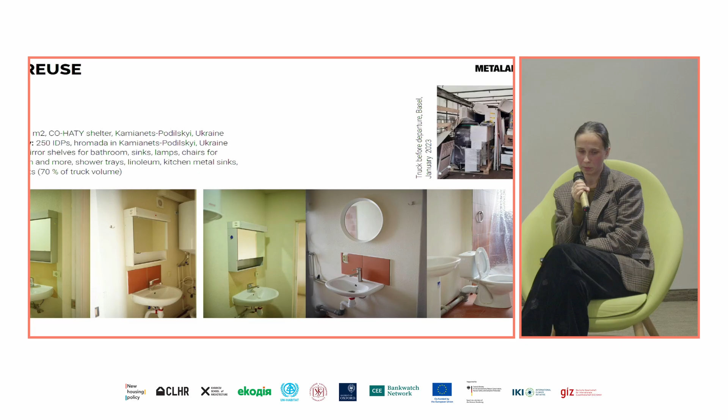Reuse for us is a story about preserving memories.

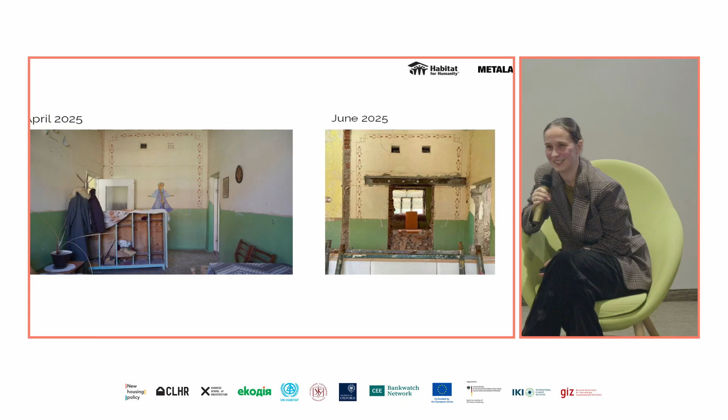We also shared stories from the kindergarten, and this city mayor went to this kindergarten. It was pretty interesting. And also there was a kindergarten teacher's assistant. She cited a poem, told us an interesting story.

We understood that this integration really means something and can even happen via architecture.

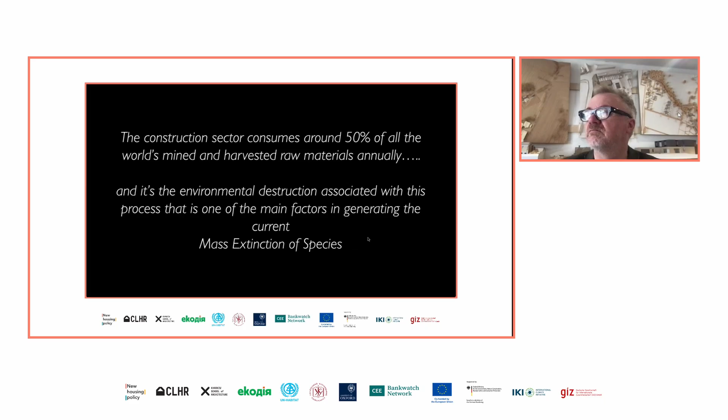The United Kingdom alone consumes 600 million tons of products every year, and it generates 200 million tons of waste a year. And the construction sector is responsible for 2/3 or 63% of that, which equates to 120 million tons of material coming from the construction industry into landfill and incineration every year.

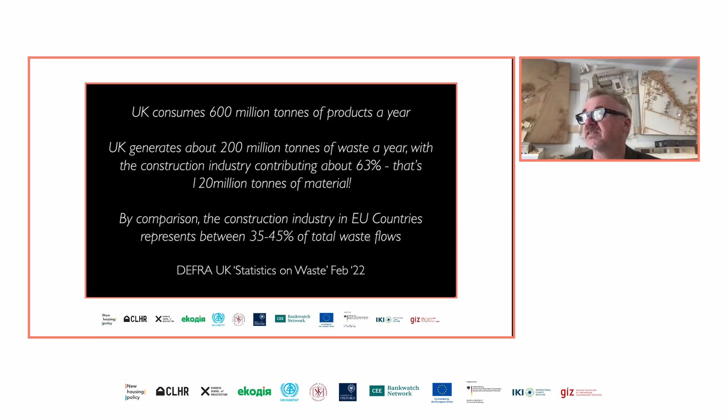Now, by comparison to the rest of Europe, the construction industry across Europe will create between 35 and 45% of total waste flows, whereas in the UK it's more like 63. So I say to you, hold on to what you already have and reuse it. Avoid the tariffs. And by that, I mean the Trump tariffs. We never know what things are going to cost because we never know what the tariffs are going to be.

I understand there's going to be further tariffs today on countries complying to the 1.5 degree temperature rise Paris Agreement. It's all about managing your existing resources and dramatically reducing the need to consume new raw materials, and reducing reliance on the previously manufactured.

A phrase I came up with in my book in 2017: mine the Anthropocene, or the Anthroposphere. The Anthropocene is the current geological epoch we're in, the human-made geological layer that wraps the planet, whether that's ocean plastic, landfill sites, or our cities. But if we mine the Anthropocene, we can nurture natural resources, give them a break from supplying us with raw materials. We've got to reuse the previously manufactured.

The challenge in doing this is that planet Earth exists as an ever-accelerating linear economy, where we take natural materials, process them, make them into things, and moments later throw them away. No other natural system works like this.

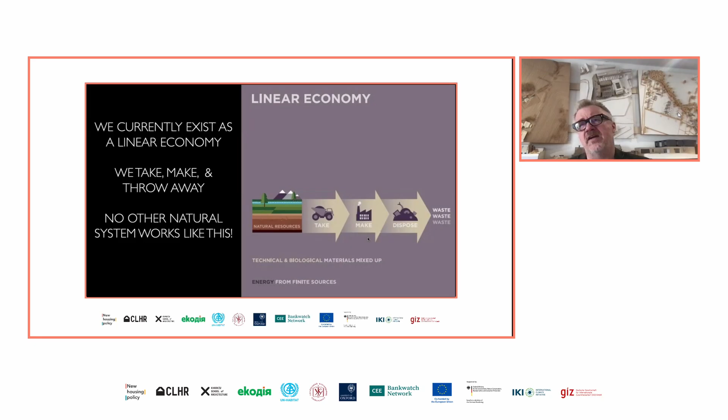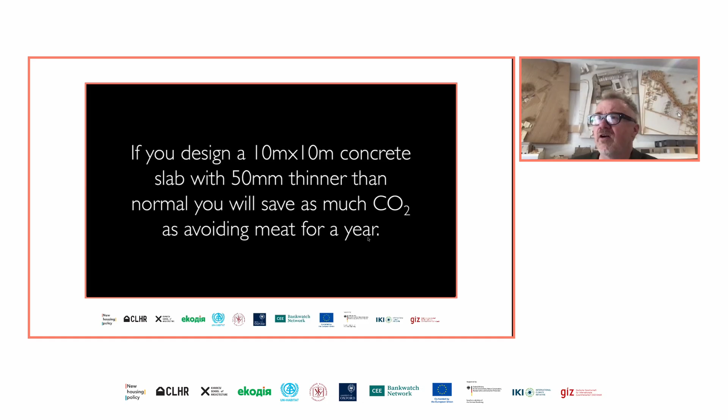Some good news: we know what to do. If you design a 10 meter by 10 meter concrete slab and make it 50 millimeters thinner than normal, you'll save as much carbon as avoiding meat for a year. We are in an impactful industry in the construction sector.

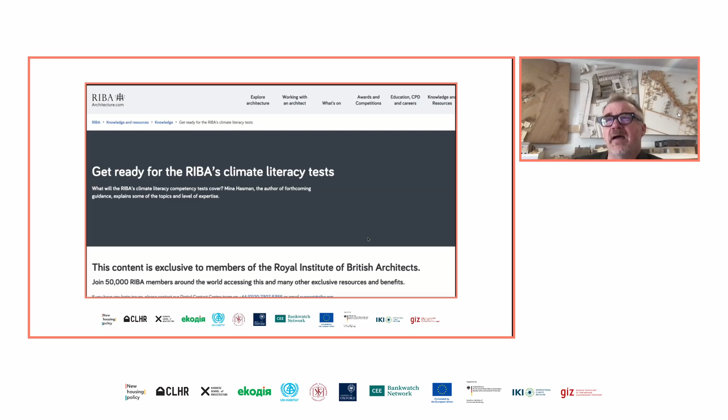The other good news is everybody's still asking, what is a circular economy? We've got famous architects in the UK like David Chipperfield winning the Pritzker Prize, the biggest award in architecture, saying that retrofit, the reuse of existing buildings, is not only the right thing to do, it's the more interesting thing to do. The Royal Institute of British Architects, where I sit on the National Council, is asking its 50,000 members to brace themselves because they're going to have mandatory climate literacy tests.

Our industry in the UK has also got a brand new UK net zero carbon building standard. We're going to benchmark and acknowledge embodied carbon as well as operational carbon.

DEFRA, the Department for Environment, Food and Rural Affairs, one of the biggest UK government departments, has for the last year had a circular economy task force looking into creating a circular economy plan for England and Wales. This was an event I went to on Thursday night.

We had 450 people on the London Eye, the great big Ferris wheel in the middle of London. Tier 1 companies were there, some of the biggest construction companies in the UK, as well as others from across the whole construction sector. It's very exciting. This is just some of the people waiting to get onto the London Eye, all committing to circular economy practice.

It's great that we were in the city, because I think cities give us hope. At the moment, most stuff processed, manufactured, and consumed arrives in cities, but it arrives in separate, linear flows that don't communicate with each other. So stuff flows into the city and then out.

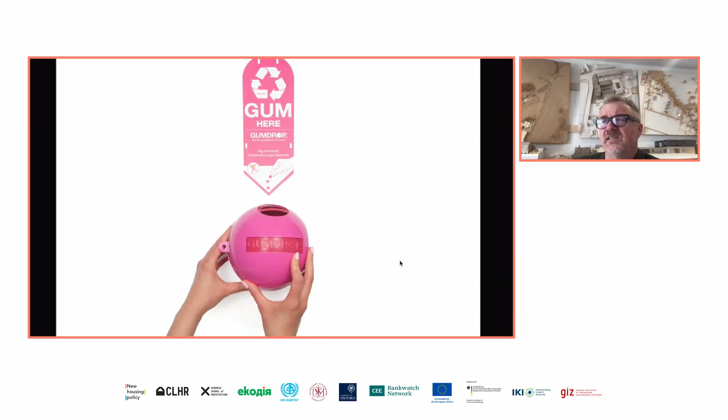So that's turning a nasty linear problem into a circular success. And she has other products as well, like the soles of these Stan Smith shoes are made out of old chewing gum.

Now, step 2 is the step that I'm more interested in, because it doesn't include or require so much embodied energy. You're not shredding or melting or crushing something. You're carefully deconstructing stuff for reuse.

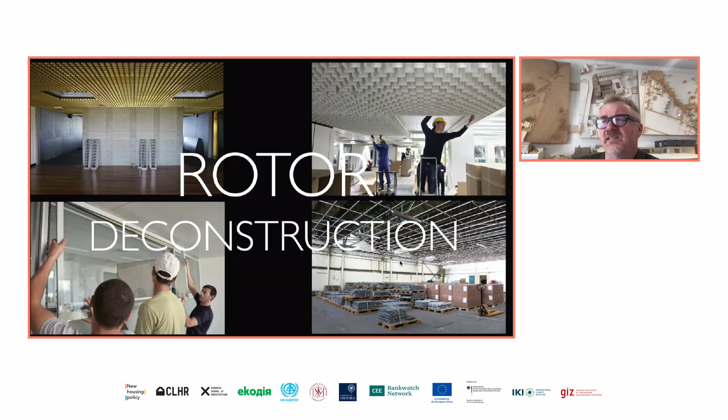And this is Rotor Deconstruction, who are based in Brussels. These slides should be read from top left to bottom right. So Rotor take on buildings that are normally demolished, and they carefully unpack them, redistributing the material in their own yard and on the digital platform they've got. This is a collection of buildings in Brussels that they're working on at the moment, part of the World Trade Center in Brussels.

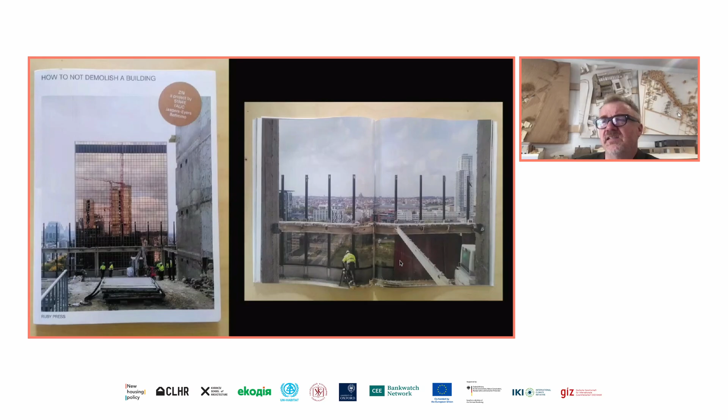This is only one little bit of it, a big development from the late 60s, early 70s. The buildings are not performing very well by current standards - they're overheating or cold, big energy guzzlers. So this is a story of how these buildings are being adapted, being taken down, deconstructed rather than demolished, and the deconstructed material is being cleaned up and redistributed into the supply chain.

And these are 2 images I took when I went to visit Rotor's facilities in Brussels. As I said, they also have this digital facility as well.

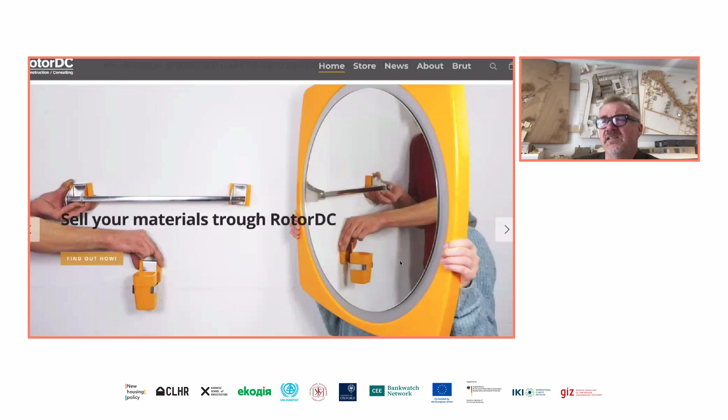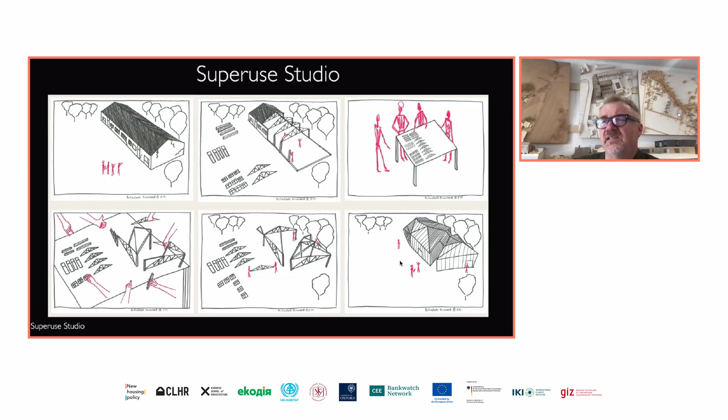Here's a company from Rotterdam called Superuse. I like these sketches because they're simple, but they show the story of how a derelict school became a new school. Here's the derelict building.

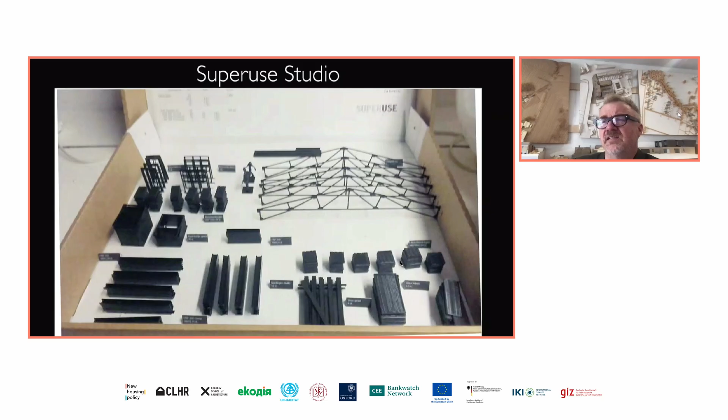Superuse did a 3D printed model of the building, but they broke it down into its components. They worked with school children to reassemble those components like a game. And then the old building material was used to make the new school. So this is the material of the old school becoming the new school, but it's totally different.

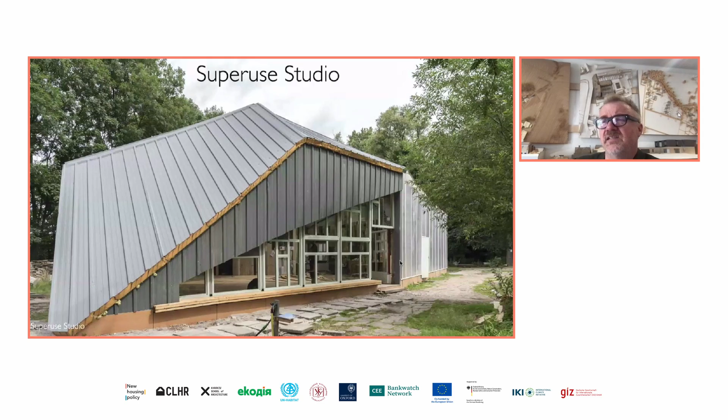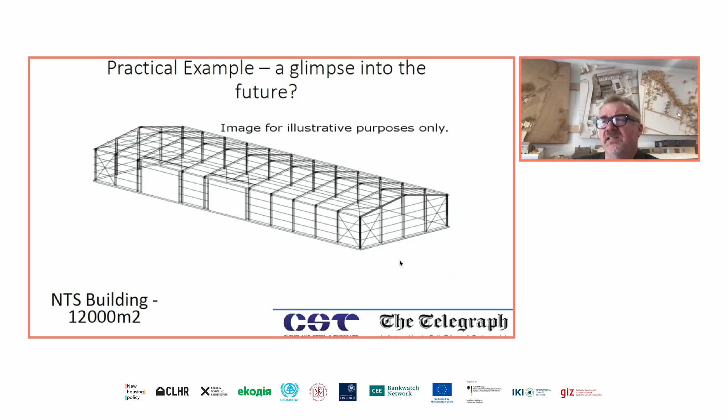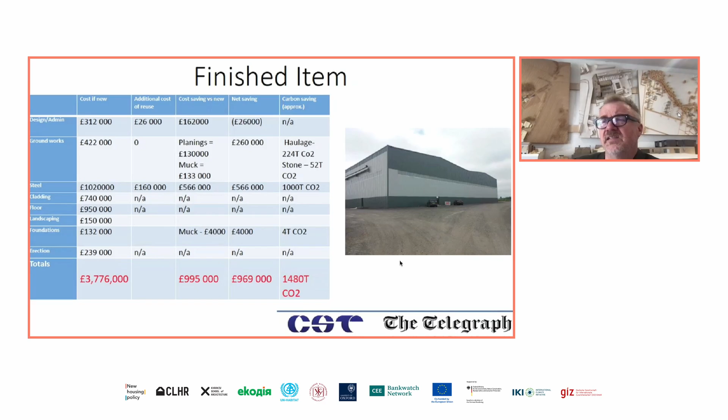This is a bit more ordinary in a way. This is a steel frame of a building that was in Dublin, Ireland, and a company called Cleveland Steel needed a new big warehouse for their company in Yorkshire, Northern England. Instead of getting a new one, they found an old one in Dublin, deconstructed it, reassembled it, and there it is. It's not a pretty building, but they saved £1 million on a £4 million project by finding a second-hand building and going to the bother of deconstructing it, taking it across the Irish Sea to Yorkshire and rebuilding it.

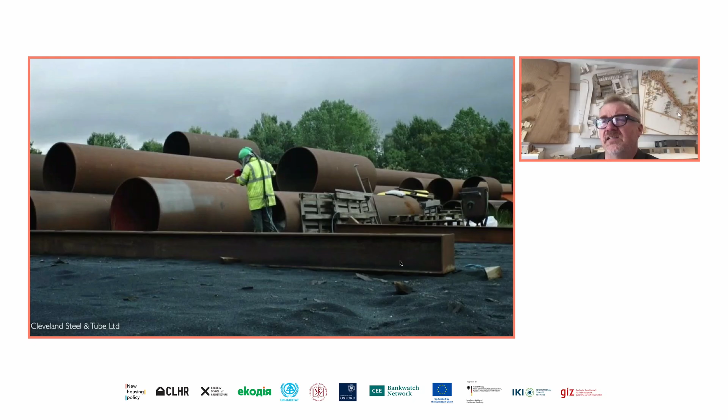And here's their facilities. This is what they normally deal with - surplus oil pipeline material. This is normally used to create new football stadiums or sports stadiums. But what's really interesting is they've got a new market now, one of the big successes in the UK at the moment: people deconstructing steel frame buildings. And here they are, the I-beams of steel frame buildings on the right-hand side, for new buildings.

So this is a new market in the UK where people are using second-hand steel, not recycled steel, second-hand steel. And this is the last project I'll show for this talk.

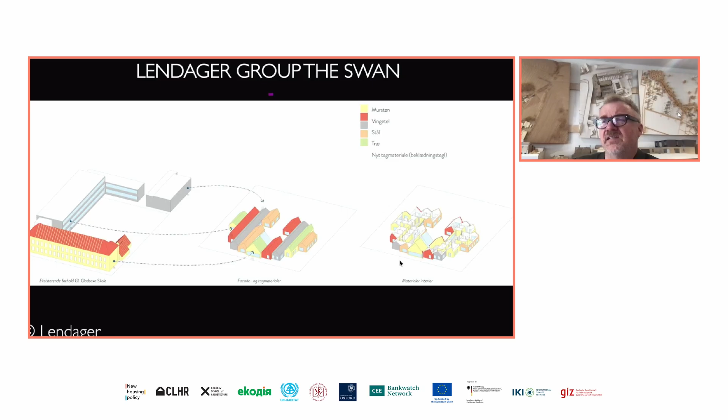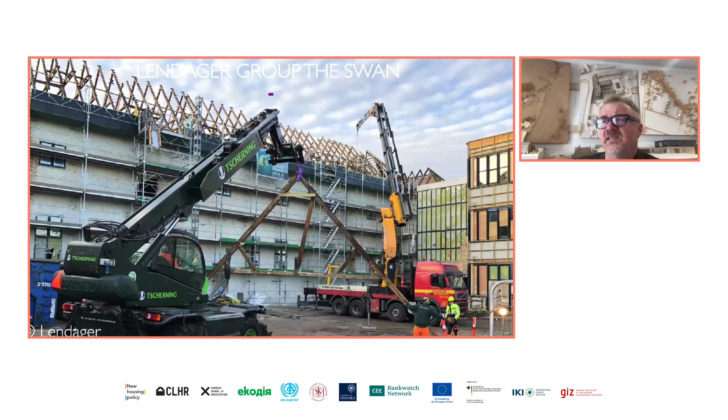This is the Lendager Group in Denmark, creating a new school out of a derelict old school. This drawing tries to explain the old school on the left, creating the new school. And here it is being deconstructed. As with a lot of school buildings on campuses, the buildings are from lots of different eras. The main image shows the 19th century building, but on the right you've got the 1980s and 1990s bits, and the palette of materials is quite interesting and varied. So these are the materials coming off the building.

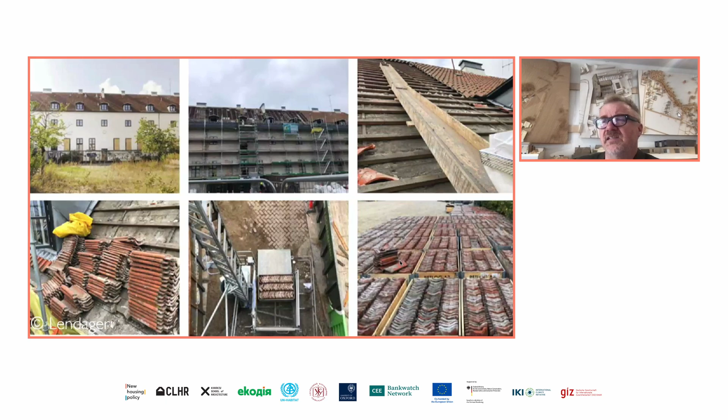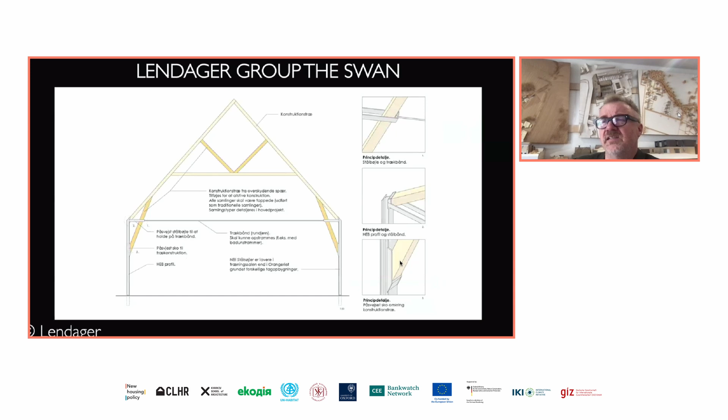And then these are drawings they made of the new classrooms using the old materials. Here's a structural engineer's drawing showing the original timber trusses that aren't quite up to the job of the new trusses, but they get reinforced with a bit of steel.

And here's the new school made out of the old school. And that's my last slide. I'm not commenting on the aesthetics of it or the architectural form of it, but that is a new school made out of the old derelict school. And I'll leave you with that one.

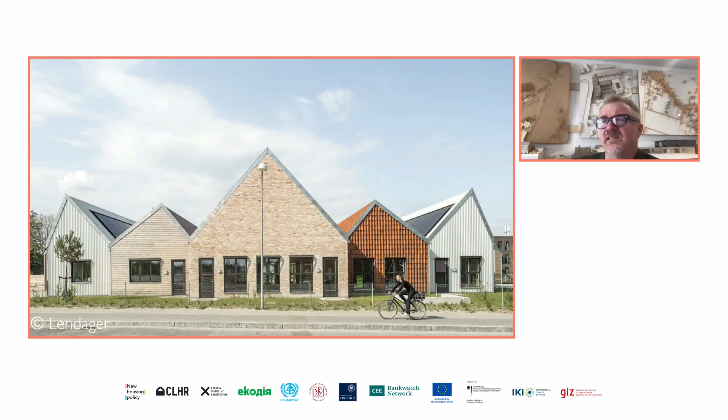For me it's really, really interesting to talk about all these different possible options to work with the topics you discussed, with different typologies, different types of projects. Let's continue after our next lecture in our panel discussion, so please stay with us.

I'm waiting till I see the... You don't see it? You already started sharing, no? We can hear you, sorry, you're on mute. I cannot see the presentation. So maybe you could just give a few comments. Do you see? No? No, and the microphone is cut again. You are muted, Bart, you are muted.

Sorry. So basically Neo-Eco is a French company created 17, 18 years ago. What we try to do is look at waste from a different perspective. For us, waste is a product that has certain characteristics and is waiting to be reused or repurposed. So we typically consider ourselves primarily material engineers, not architects. There are enough architects and great architects in the room, I believe, but we are primarily material engineers, and we dream of a world without waste.

Ready for it? Yeah, now I see it, perfect. We gradually tried out a lot of things. So what is very particular in Neo-Eco France, but also Neo-Eco Ukraine, is that we advance by doing, by experimenting, by learning. Often legislation in France, when we were doing things at the beginning, was not adapted to circularity or the idea of circularity. So we took inspiration primarily from how can we recreate a material that has the same functionalities as a linear economical material. And the second thing, which is often more complex, is can we do it economically? Meaning, can we produce a material that is technically equivalent and price-wise competitive to linear economy?

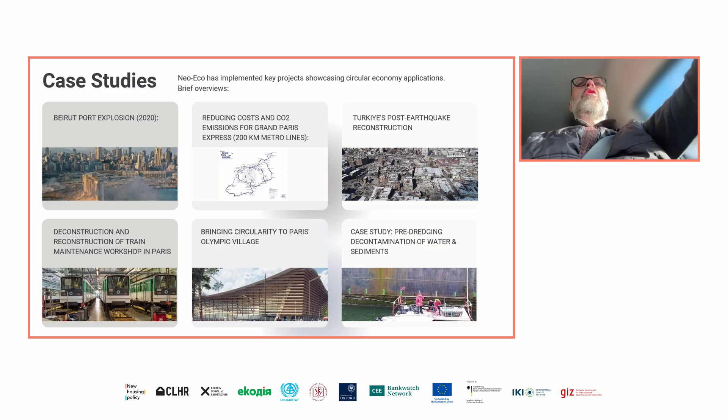So in the 2024 Games, the majority of the material that was used was circular material, coming out of this kind of project and some others that we've done.

And the cherry on the cake for them is that they discovered, on the first line that we worked together with them, that it was not only good for the environment and everything, but the fact that they didn't have to transport waste over long distances, and didn't have to bring in a lot of new products, meant in fact that they could save a lot of costs. They extrapolated that onto the whole project - if they would have done the whole project in a circular economical way, they could have saved around €500 million.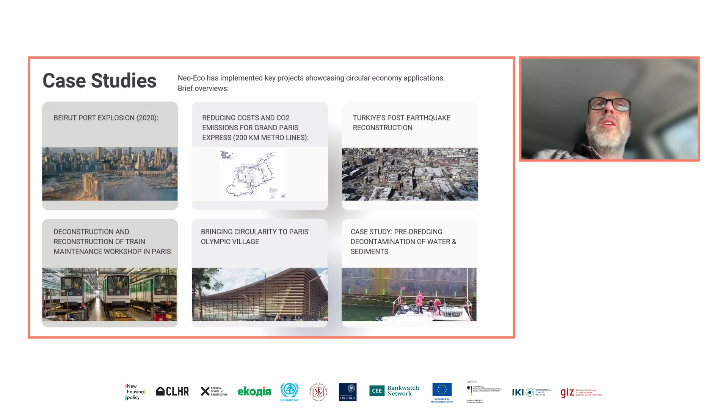Of course, as I mentioned, we did one metro line. On that one metro line, they saved €80 million, which is still significant. And now they are still constructing a new metro line between the airport and Paris center, done the same way.

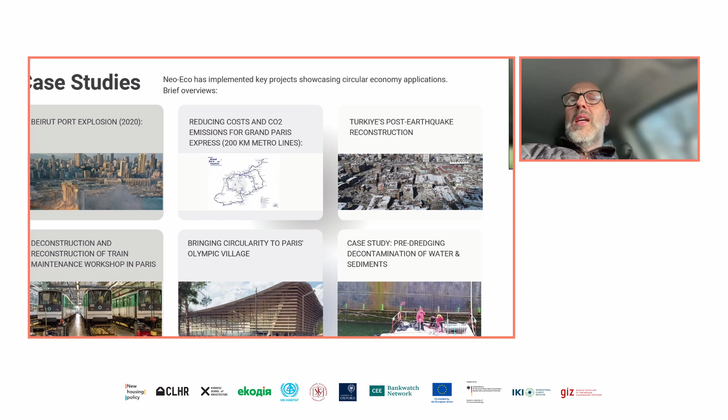In the north of France, they are constructing a new river channel connection with the Belgian port of Antwerp - that is also done now in this way. So what became, from 2017, a crazy story, became a standard practice in public works and large infrastructure works. There's also a new high-speed railway line being constructed in the south, with the same approach. So it's a great use case of how circularity has to fight against prejudgments, also in France, and still today in France, but how, through large projects such as this, the Olympic Games, we gain traction.

Before I give the floor to Lidia, what I want to say is that when we started in Ukraine, we came, of course, with our experience from France, but in fact we nearly had to start from scratch again, because legislation is different, the prejudgment is different. It is not because it works in France that people believe it can work in Ukraine. So we started more or less in summer '22 with the project.

So at the beginning, we had the idea that, okay, we need to deliver expertise from France to Ukraine. Three years later, the idea shifted a little bit, in the way that often we also transfer knowledge of what we learned and what we are doing in Ukraine to the colleagues in France, or for example colleagues who are working on projects in Turkey post-earthquake.

So I think what is very important to understand, for the people in the audience or online, is that for us, Ukraine is not so much about us, as a French mother company, teaching how we do things in Ukraine, but it's above all a learning experience - how to adapt what we know from France into the Ukrainian context, but above all also to learn a lot from Ukraine and bring that back to France or other international contexts. So for us, the image we like to use is that Ukraine is not only fertile soil for agriculture crops, but it is above all extremely fertile for innovation.

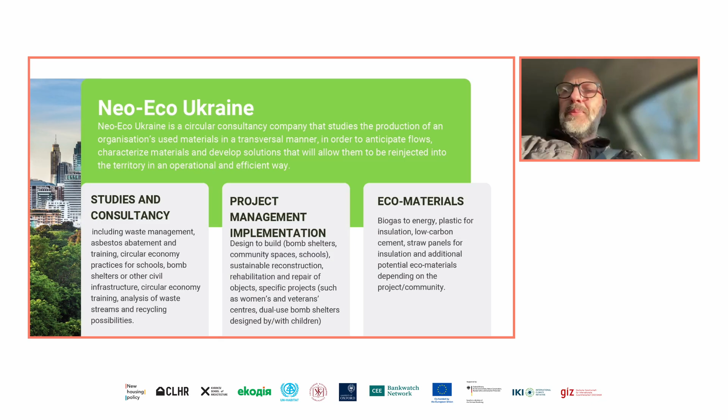So as I told you before, my colleagues, Bart is a multitask person, so now you see it by own.

Thanks a lot, Bart, for this introduction. I will switch to Ukrainian language just to be very clear and try to be short and sweet, because I think by the end of the day everybody is a bit tired and thinking about dinner. So yeah.

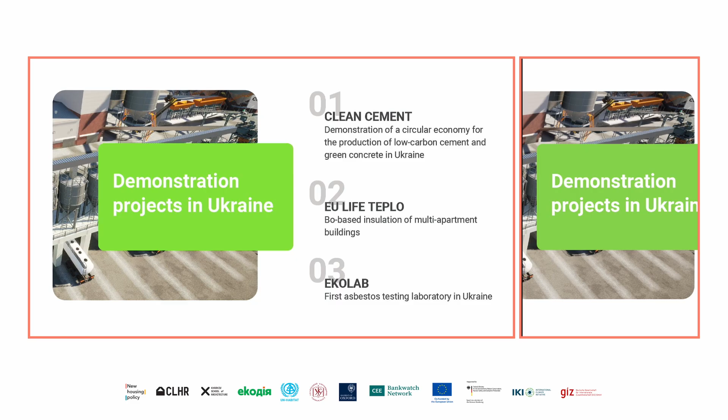On clean cement, the basic idea, as Lidia touched on, is that in the construction industry the primary source of CO2 emission is cement, the binder. In Mykolaiv, we have a pilot plant under construction by which we want to demonstrate that waste from steel making could be used for the reconstruction of Ukraine. It's a multi-stage project: first to do the standard recipe, and over time to inject CO2 as an additional binder. We are convinced that in Mykolaiv, over a time frame of 2 years, we will be able to make a binder that is close to zero CO2 emission, which would have a huge impact on the climate impact of the reconstruction efforts that unfortunately need to happen in Ukraine now, during the war and after the war.

It's a very challenging project for the simple reason that we are not so far away from the front line. We are in a small community that is not used to having an industrial project, and we have energy problems like anywhere in Ukraine. So it's quite challenging, but we don't give up. We hope to be operational by the end of this year, but let's see what the reality is, depending on a lot of different topics.

In this demonstration project we will be able to produce more or less 20 to 40,000 tons, which is still a lot of volume of low carbon cement. So people in the audience or online doing projects in Mykolaiv, South Mykolaiv, South-West Dnipropetrovsk region, and in Kherson right bank part are more than welcome to reach out to us to see how we can supply you with this product, which comes at the same cost as regular cement. It's not priced above it, it's at the same price range, but it has the benefit of using existing industrial waste, and the advantage of not emitting high volumes, and over time, hopefully, zero volumes of CO2. So that is about clean cement. Back to you, Lidia.

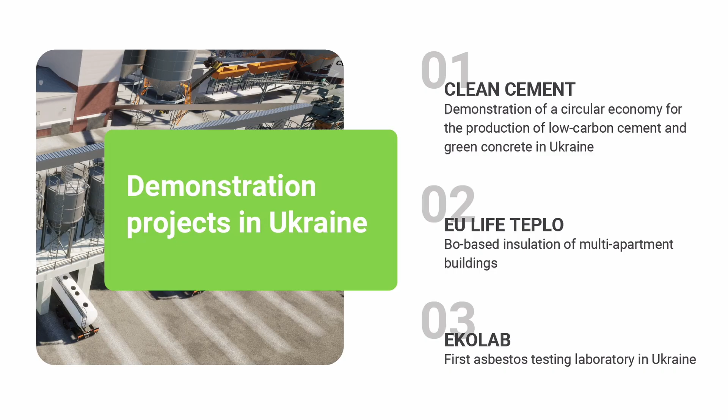We plan to use also iron ore waste from Kryvyi Rih, and we will be able to create an absolutely new product, and we will be able to reconstruct much more efficiently. We will be able to supply it to the end consumer.

In Gostomel, we achieved 95% recycling. In Mykolaiv, 90% recycling of the debris of the damaged houses.

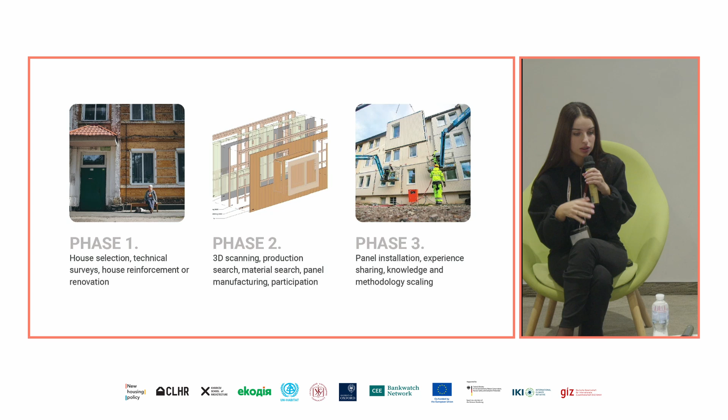We will share that we decided that we would use wood because it is light and has a long life cycle, water resistance, energy efficient, and absorbing air - one of the best materials.

Before, I knew very little about eco materials. Everyone says eco, but nobody says that eco is circular - that is a different thing. There are a lot of standards regulating safety or eco-friendliness, but it doesn't show that these materials will be reused. In the circular economy, it means that the product is used, and after its usage, it will be recycled and reused. For us and for eco companies, it's very important to return these materials back into the cycle.

So when we started to work in Ukraine, we encountered the following problem: there are contaminated materials on the building sites, but a building hit by a missile is completely different from infrastructure damaged by an earthquake. So the experience of Ukraine is unique.